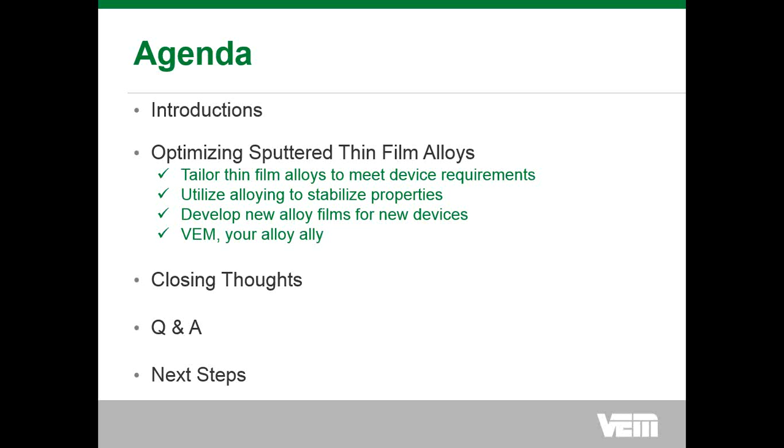What I would like to do is to illustrate issues faced by thin film engineers as they're developing new devices and moving their technology forward, and how that translates into the challenges for the sputtered target materials engineers, the guys making the sputtering targets. We will all employ material science, including chemistry, physics, and engineering. And I want to emphasize that communication and cooperation between the user and the producer of thin film source materials, the sputtering targets, is a key to success.

So Dan, a couple of my customers ask a few key questions. The first being, I can't light my plasma. What can I do? And immediately, as a sputtered target materials engineer, I'm automatically thinking about what is the nature of the material that's being sputtered. Is it conductive? Is it an oxide? Is it a metal, suboxide, etc.? If it's a magnetic material, my mind is automatically going toward understanding how the thermal-mechanical processing may impact the magnetic properties of a target.

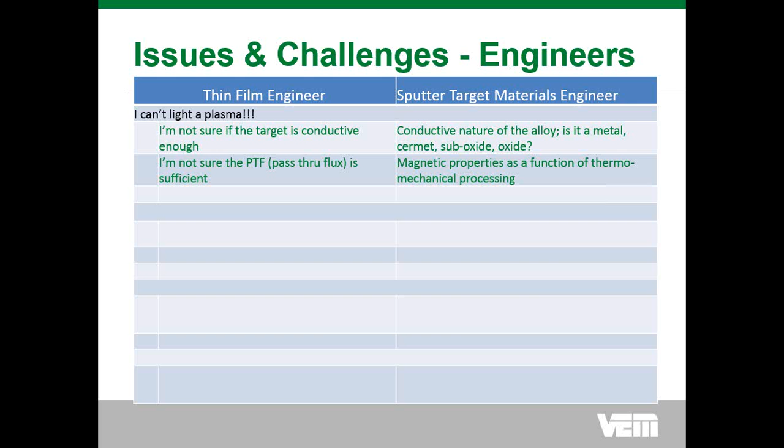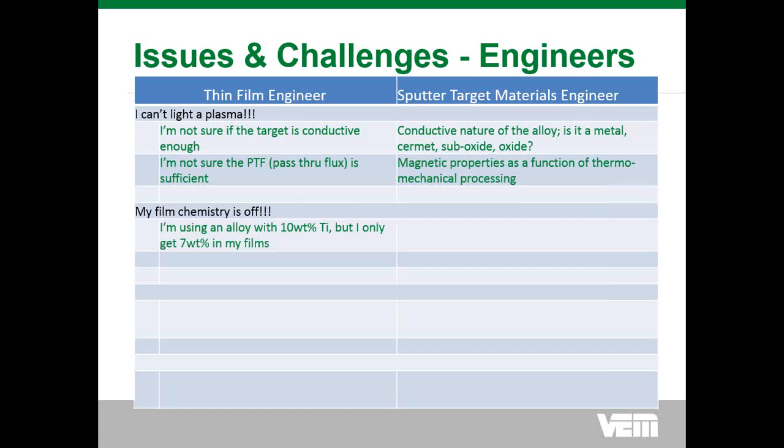The next question is, my film chemistry is off. Say I wanted a tungsten titanium with 10% weight titanium and 7% weight titanium, but it's not coming out how I want it on my film. What do I do? And that's where we, as a sputter target materials engineer, will be thinking, what is the interaction between the elements in that sputtering target and their interaction with the plasma?

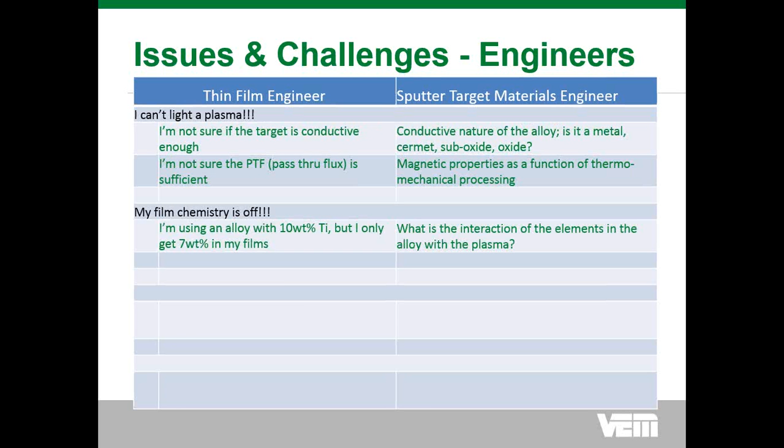Next question is, I want my films to do something new. Can you help me with that? Wow, and that's where it really becomes a challenge for the target engineer. First questions are, what is the material? What does the phase diagram look like? Is there a phase diagram? And it also points us into the direction of needing to do background research and figure out whether or not we need to develop new processes to make those materials to meet the thin film engineer's requirements.

Finally, my films aren't performing the way I want them to. Is there anything you know how I can do that? Yes, by looking at the types of films that you, the engineer, are using for thin film applications, it's our job to understand what alloy additions will help solve the performance without changing the overall performance of the basic alloy. And I'll go into this some more as we go forward. So let's see if we can help.

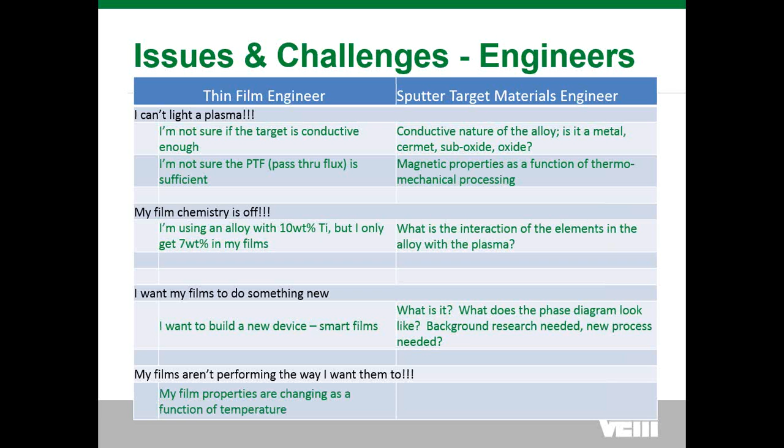I think the first thing we need to address is, what is an alloy? And then we'll talk about the properties that need to be controlled, the need to design alloys to meet those properties, and then what it takes to manufacture those materials in a form that lends itself to high volume manufacturing. And this is where vacuum engineering, for instance, comes in as your ally or your partner in this development.

Excuse me. In the simplest form, an alloy is the intentional combination of two or more elements, one of which is a metal. Some of the most common alloys that we all encounter is, for instance, steel, which is an iron-carbon combination.

Stainless steel is iron and chrome, or iron, chrome, and nickel. Commonly in the thin film area, we encounter resistor materials such as nichrome. This is a nickel-chrome alloy. And in barrier materials, they mentioned the tungsten titanium alloy, which again, we have developed these types of combination of metals to produce materials that will serve as barriers to interdiffusion.

Other alloys may actually incorporate ceramic materials. I include this in the whole area of what are termed cermets. The hard drive industry in the data storage world uses a whole host of cobalt platinum plus oxide type materials. These oxides may be as high as 30 or 40 volume % in that material. Again, the challenge is to use these materials to produce thin film that produce desired results, and on the target manufacturing side, the question is, how do I make them?

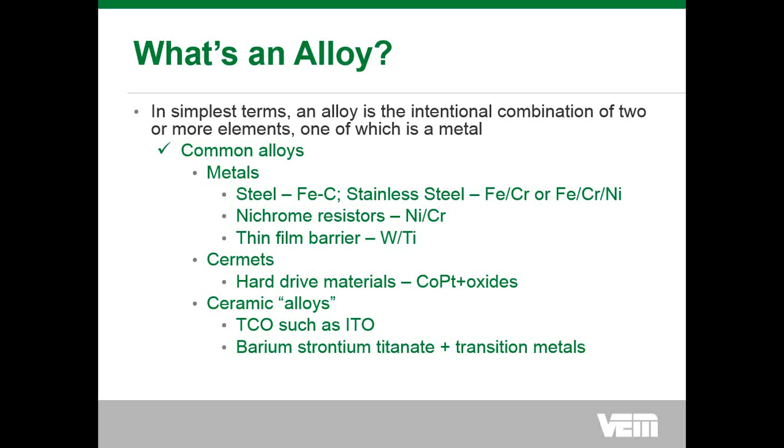So what properties do you want to control? And this is, again, from the thin film engineer. They may want to be controlling interdiffusion, film resistivity, contact resistance, electromigration, the crystal parameters, the crystal lattice structure. Smart materials are gaining much, much more attention these days, such as piezoelectric, magneto-optic, thermoelectric, and I can go on with many different types of smart films. In the magnetic area, people want to control in their thin films the magnetic coercivity, the saturation, etc., for both the media and the thin film head.

At the same time, controlling those properties, the thin film engineer needs to be sure that the source material can be sputtered. And really the challenge there is, if it's a magnetic material, how do I make it less magnetic so I can sputter it? If it's a conductive material or a non-conductive material, I need to be able to think about how I can take a non-conductive oxide material, for instance, and make it conductive enough to sputter using some of the various rectifications. And at the same time, as the thin film engineer goes from development into production, they're looking for efficient use of their materials or better material utilization.

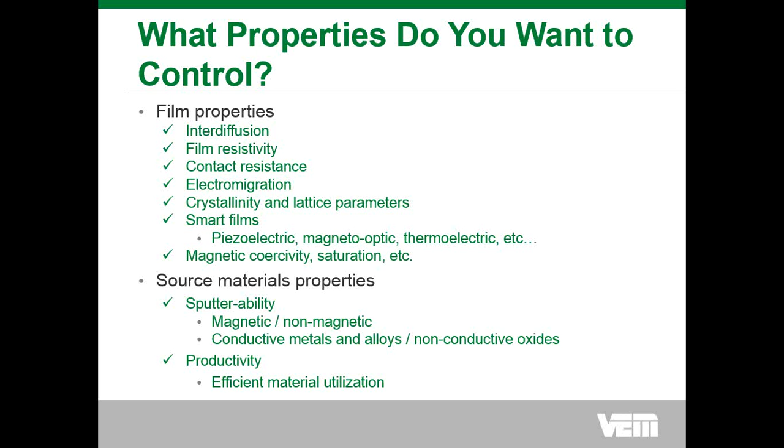So in order to minimize or eliminate that problem, the thought was, how about if we supersaturate the aluminum? And by supersaturating it, if you put 1% by weight silicon, you won't have this problem, you will eliminate the desire for that interdiffusion to occur because you've supersaturated and the chemical driving force is no longer there. So this is where the aluminum 1% silicon alloy was developed.

And then as the technology has progressed, what we find is the current densities, the amount of electrons going down a circuit path, becomes ever increasingly higher. Today, well above 10 to the 6 amps per square centimeter. When you're flowing that much electricity down a very fine conductor, not only do the electrons flow, but you get a net flow of the atoms in that line, leading to the problem of electromigration. To solve this problem, the semiconductor industry developed the aluminum copper alloys. And what they're making use of is the fact that aluminum copper will form intermetallic compounds that will form in grain boundaries, minimizing the ability for the aluminum in that trace to actually migrate.

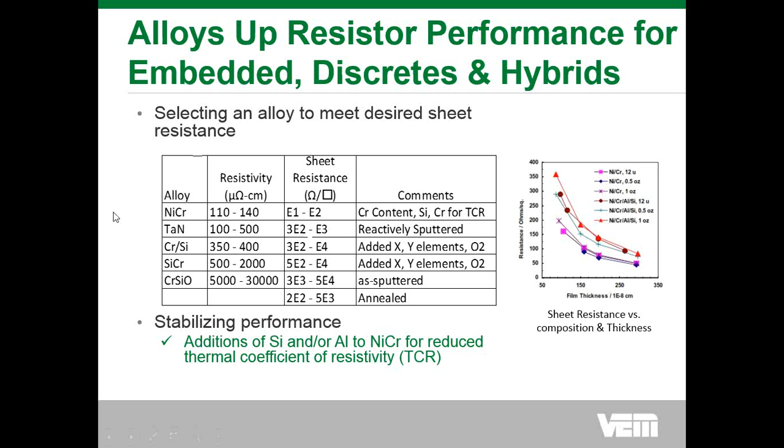The one example I'm referring to utilizes not TiO2, but TiO1.8. The oxygen deficiency improves the electrical conductivity sufficiently so that you don't have to use RF rectification, but you can use DC, pulse DC, or AC type rectification. However, if you're trying to get a TiO2 film, you're still going to need to bleed in a reactive gas such as oxygen to get a stoichiometric film.

Another question that I come across fairly often is, gee, I've asked for a specific alloy, you made the target of that specific alloy, but the composition isn't correct. One of the most common examples of this is sputtering with tungsten titanium. The industry typically will use a tungsten 10 weight% titanium film. However, the film generally will have 7 or less weight% titanium in it.

What's going on? Well, if you simply look at the difference in the mass of the titanium and the mass of the tungsten as they collide with the argon atoms in the plasma, the tungsten colliding with the argon atom will tend to continue straight on to the substrate. Or if it scatters, it'll scatter at a much lower angle than colliding titanium and argon, which will scatter in a much wider direction. We also see this phenomenon when trying to sputter alloys such as aluminum scandium or lead zirconium titanate, PZT. Very often you have to optimize the target chemistry to match the substrate film chemistry.

Controlling the alloy film, as I mentioned earlier, just if we look at resistor films, not only do you want to get a specific resistivity in your film, but that resistivity will change as a function of temperature. And so another one of the challenges of the thin film engineer is to control that variation, to control that change in resistivity as a function of temperature. And purity may not be the best answer.

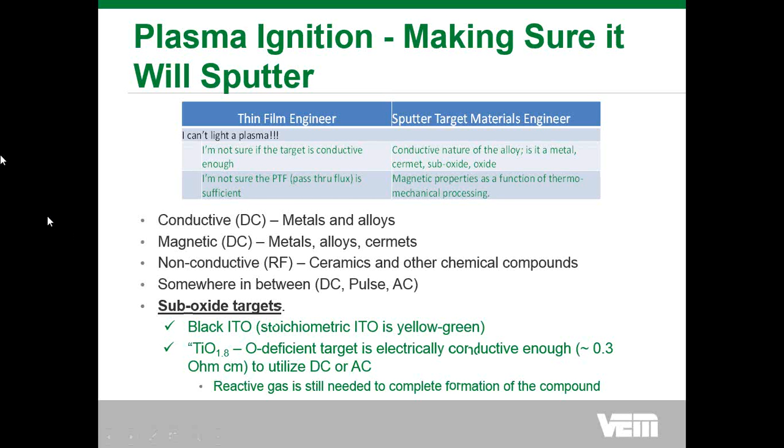Looking down that, essentially what we're doing is intentionally adding aluminum to that nickel chrome alloy to intentionally make the material effectively less pure. And you see, as a function of the amount of aluminum that has been added to the nickel chrome alloy, the thermal coefficient of resistivity can be dropped down into single digits. So again, it's the idea of understanding what we can do with the target material that helps the thin film engineer control the properties they're trying to control in their devices.

One question that we did not raise was this question of, now I understand the chemistry, I now have a sputter target that will give me the film that I'm looking for. Now I want it to last a long time because I'm going into volume production. And one example of this is sputtering nickel. And nickel, as we all know, is a magnetic material. But if I look at the phase diagram and I see that curved line down at the bottom left-hand side, it says magnetic transition or transformation, and the key here is if I use a nickel alloy in which I've added, let's say, 7 weight percent vanadium, it no longer is sitting at room temperature in the magnetic regime.

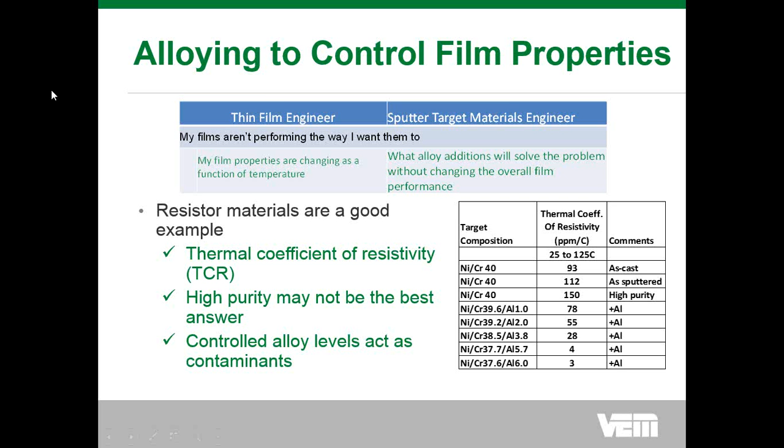And so now I've got a sputtering target that can produce a nickel film that actually etches very similar to a pure nickel film that is non-magnetic. And instead of being limited to a magnetic nickel target that may only be 3 millimeters thick, or 0.125 inches thick, I can make nickel targets containing 7 weight percent vanadium as thick as 1/2 an inch or more, thereby allowing the thin film engineer to use this target in high volume manufacturing, minimizing the number of target changes. Obviously, target changes reduce productivity.

And then finally, the most serious challenge for both the thin film engineer and the sputter target engineer is the frontier. I want my films to do something new. And so we work with the thin film engineer as they are starting to develop a new alloy system or CERMET system. And then the sputter target engineer is going to be thinking, first of all, what is this material? How do I process it? Is there a phase diagram? How can I conduct a compositional field survey to test what is the right combination of the alloys that gives me exactly what I'm trying to do?

Oftentimes, the request is for very dissimilar materials that don't necessarily want to be blended together. The question then is, how can I put these together in a form that produces a coherent, solid target? Another question, as I alluded to in the data storage industry, is how can I consolidate alloys and ceramics, CERMETs, into, again, a solid coherent target? And finally, how can I make it sputterable?

If the request is an oxide type material, we can, through processing of the bulk materials, produce what are called suboxides. And this is very often done in the area of what are called mixed metal oxides: ITO, indium tin oxide, PZT, lead zirconium titanate, BST, barium strontium titanate, and others.

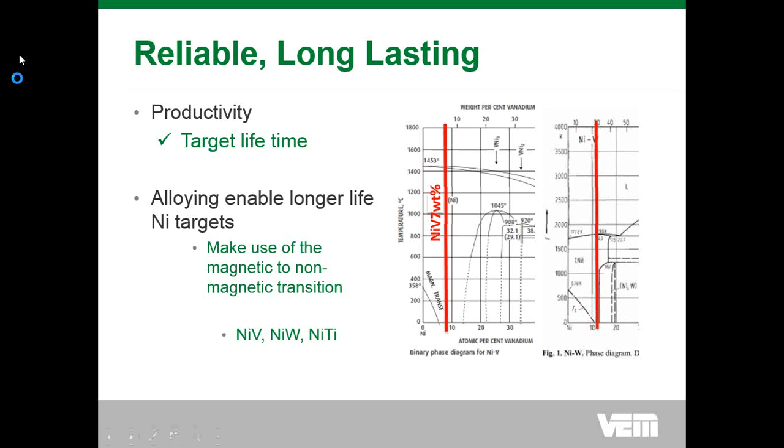And again, if I go all the way a long time at temperature, I may convert all of that to a single intermetallic phase. So again, powder metallurgy enables you to control the degrees of each type of phase being formed in your target material.

Cermets, again, for the data storage industry, are key to advanced storage applications. The challenge here is combining various different materials. It may be metals, oxides, alloys of metals plus oxide. And they all have different shapes and sizes.

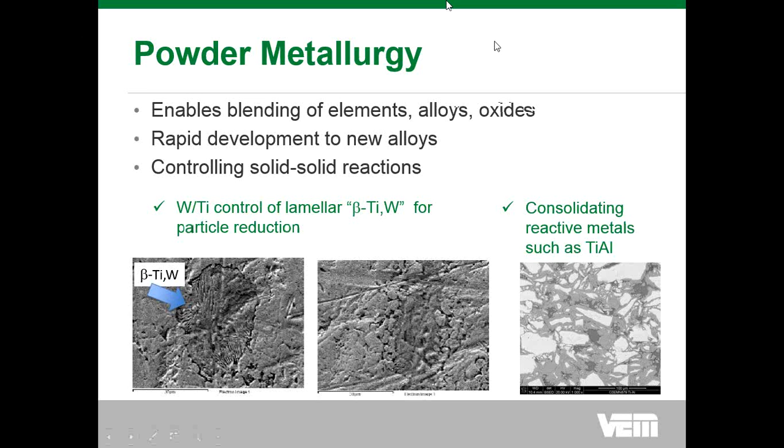Do you have any suggestions for sputtering nickel copper with a higher percent composition of copper? Well, I don't think you're going to run into the problem of a film chemistry variation because nickel and copper are so close to each other in atomic mass. I would almost expect that a copper nickel alloy with a high copper content would be virtually one-to-one in terms of what's in the target versus what's in the thin film.

Okay, thank you. The next question is, I'm sputtering with a pure aluminum target, and after the plasma starts, it is stable. But while getting the plasma to start, there's generally electrical arcing on the aluminum target. The target is about halfway through its lifetime compared to other targets they're using. This only happens with aluminum. Is it due to an uneven surface of the aluminum target, or could it be something else?